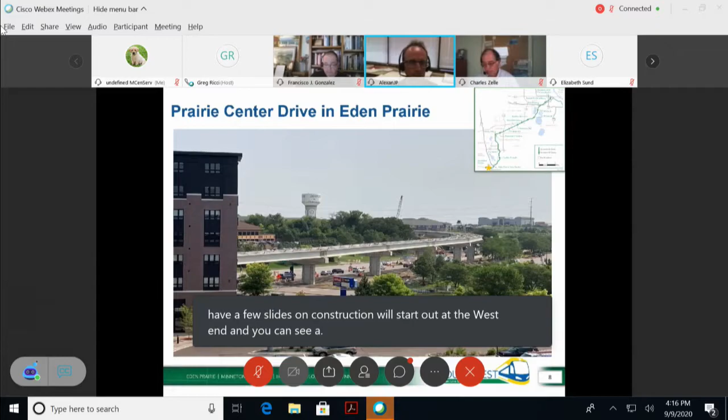So I have a few slides on construction. We'll start out at the west end, and you can see a little tip of the Elevate building there, but this is the Prairie Center Drive bridge that goes over Technology and Prairie Center Drive and will lead up to that water tower in Eden Prairie.

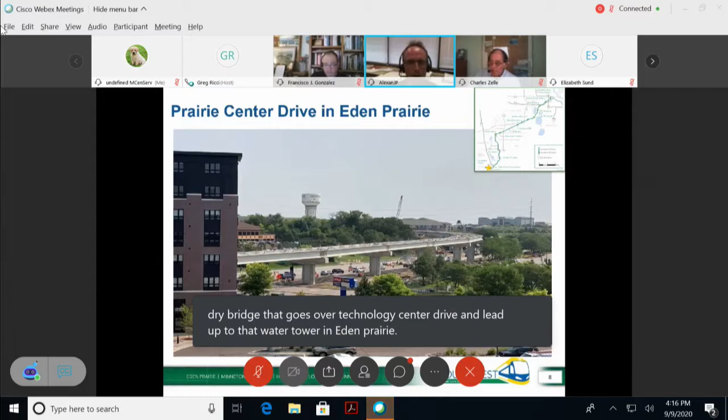This is kind of the other end of that area. This is Valley View, and you see the water tower in the background, but this is another bridge for LRT that will take us from essentially Eden Prairie in the heart of it and bring us into the Golden Triangle area.

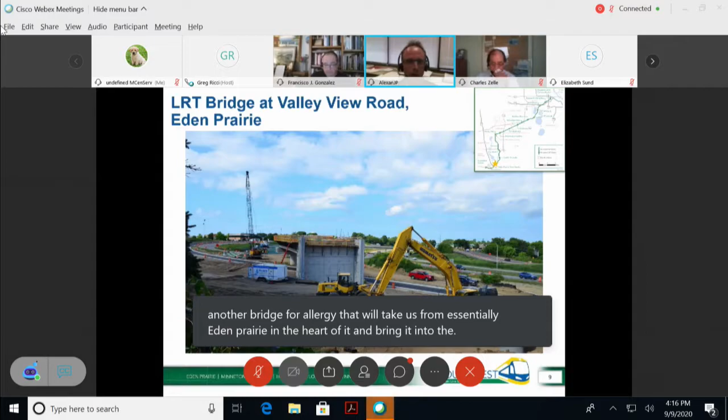This is one of our stations that's underway, Golden Triangle station, coming well along. Last time I think I showed you just a framework of a structure. It's really starting to come together here.

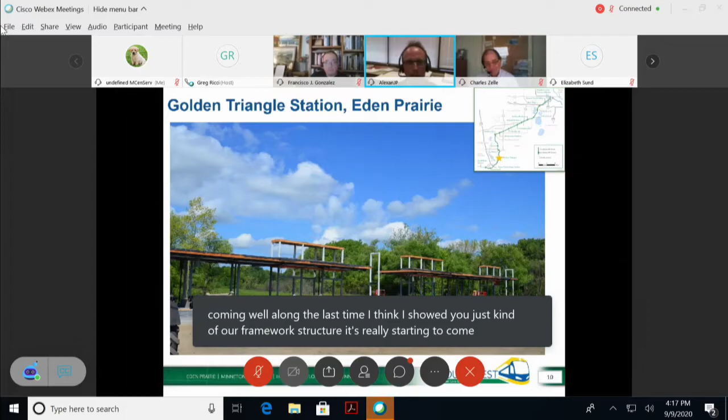Highway 62 in the background. This is the east end of the LRT tunnel that the contractor is building, and that's getting well underway. They're looking to get that all buttoned up later this fall, and we'll be working on the other segment on the south or west end in 2021.

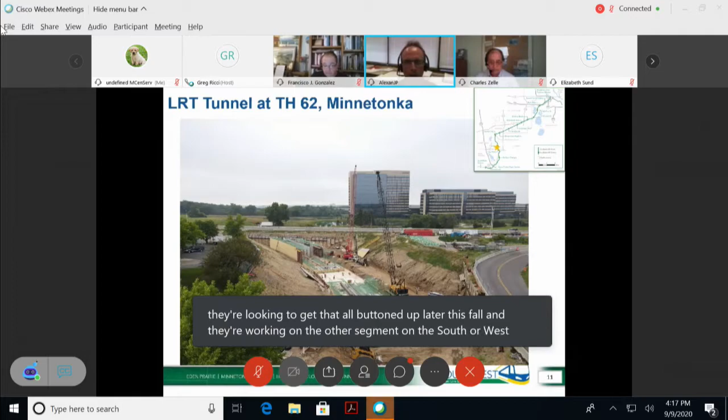Another station taking shape here, Opus Station. I think last I showed this in May, it was really a pile of dirt, and we're really making some headway on this in this area.

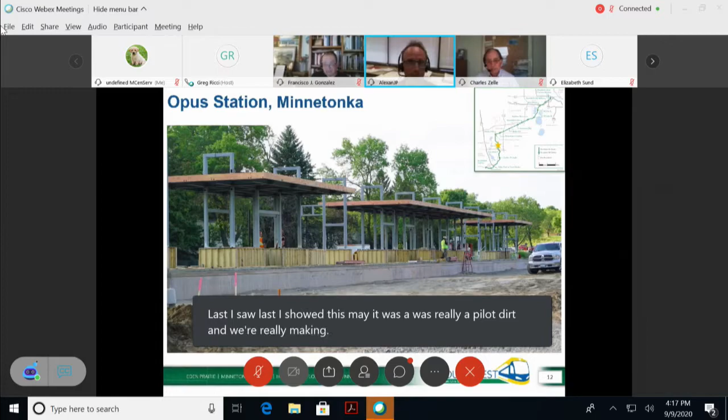Another station, downtown Hopkins. This is coming along pretty nicely.

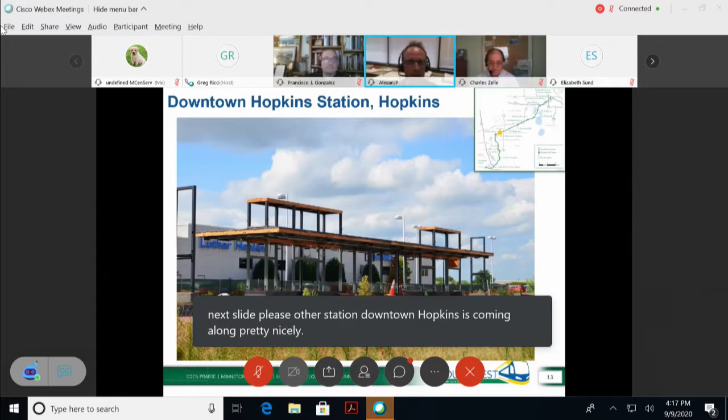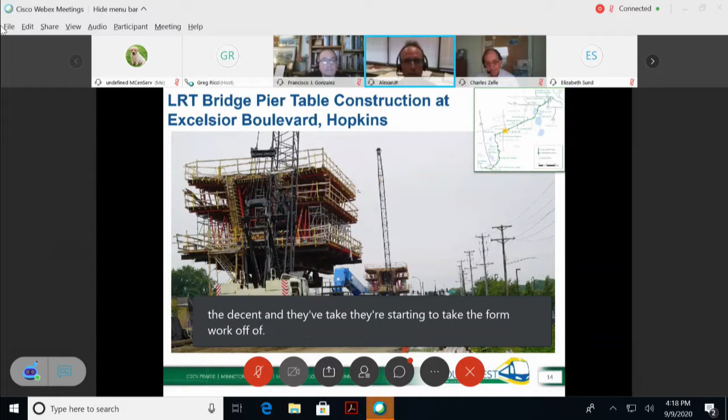Maybe one of the premier bridges we have on the project - this is a bridge that will cross Excelsior Boulevard in Hopkins. You can see it's taking shape quite a bit in the background. The concrete's already been placed for that pier table you see in the distance, and they're starting to take the formwork off of that. So that'll carry the LRT over that roadway and the freight.

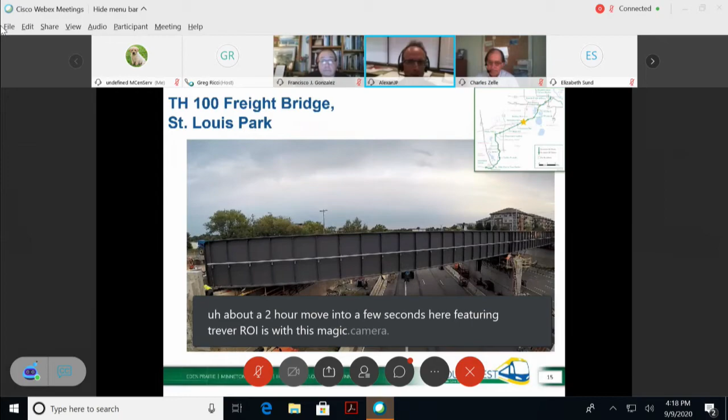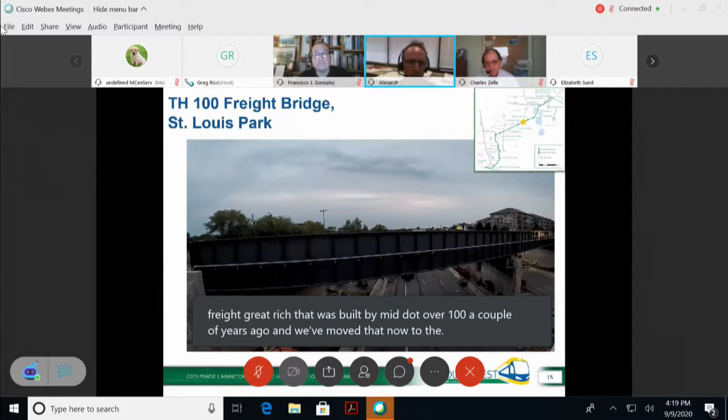But things went pretty well. There were 8 rollers under this bridge, and everything had to be in sync to move that bridge about 50 feet to the north into its permanent location. This is for the freight bridge built by MnDOT over 100 a couple of years ago, and we've moved it now to the center of the corridor to accommodate room for LRT, which would be on the other side of this bridge.

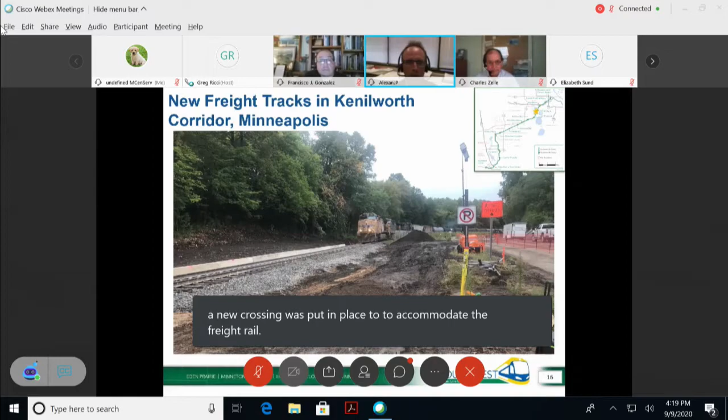Next slide, please. This is other work that occurred over the weekend. This is near 21st in the Kenilworth corridor, where a new crossing was put in place to accommodate the freight rail. And you see the first freight train coming in through that new track there early in the morning on Tuesday, and I think it's the last picture we have.

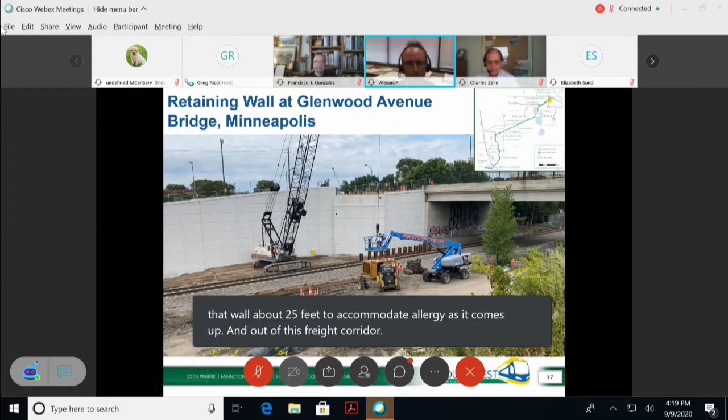This is a retaining structure that's been underway all summer long, along the BNSF line close to Royalston. This will allow BNSF to move their track towards that wall about 25 feet to accommodate LRT as it comes up and out of this freight corridor and makes its way over to the Royalston station. So, next slide.

We also give you an update on real estate acquisition status. Things are going along pretty well. Overall, 191 parcels. For the private parcels, we have 70 where acquisitions are completed, and 79 are in place. So we just note that we do have full possession of these sites for construction, and we're looking to extend some temporary easements along the line just to make sure we have

enough time to finish the work. There would be as-builts to be done, and cleanup work that needs to be done, so we'll have that in place. And related to the real estate, we have a total of 177 displacees. You can see that most of those have been closed out. A few are going through appeal, and these 5 remaining are being finalized.

So, Mr. Chair, I might pause there if there are any questions from what I presented, and otherwise I'd hand it over to Tracy.

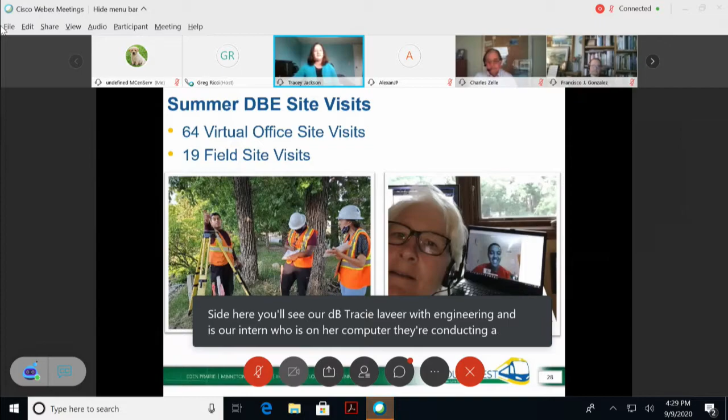In addition to virtual visits, we are also able to do field visits. The photo on the left shows a great way for us to connect with the DBEs, find out how their work is going, and learn if they have any concerns. Here we have our two interns, Charlotta and Mahad, interviewing the DBE Omar from IMO Consulting, who was conducting vibration testing on the project.

Again, it's a great way for us to connect. Some of the concerns we may hear from them, whether in the field or on a virtual site visit, is when can we expect payment, questions about schedule, or if they're a supplier, about materials on hand. This gives OEO the chance to proactively look into these concerns and follow up with the DBEs within a day or two, then connect with project staff. We can find out what pay claim or invoice is pending, and the estimated date of payment, maybe 10 days or whatever it might be. So those are some of the things we do to connect and look into.

As partnership with MDHR, when our office went out to the construction sites, we were joined by the human rights staff so they could also conduct their workforce site visits. With 3 site visits to construction sites, MDHR was able to interview 53 workers, with a breakdown of gender and ethnicity, representing 13 companies. So in closing, that's the DBE and Workforce update.

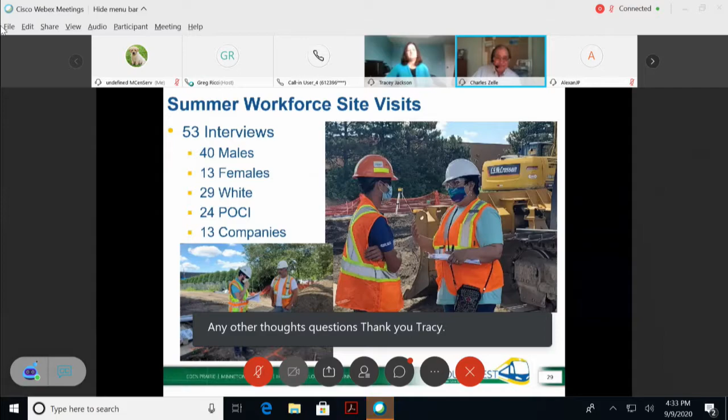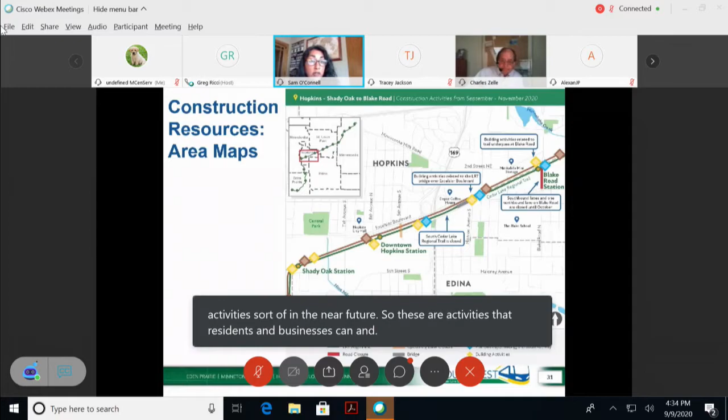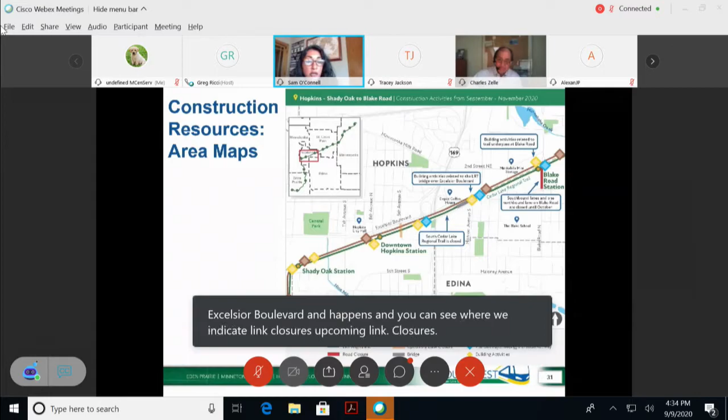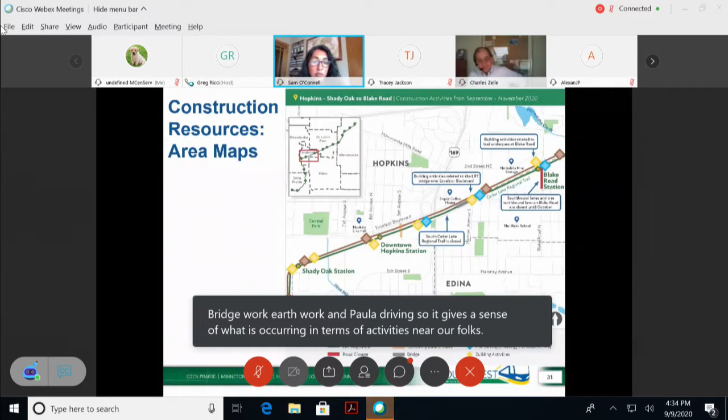Greg, if you don't mind moving to the next slide, please. Just as a reminder, an information item we feel has great value as we share with residents and businesses about our construction activities are our community maps showing activities in the near future. These show what residents and businesses can anticipate occurring near them within the next 6 weeks, and we update them on a regular basis. For example, today I'm sharing the map along Excelsior Boulevard in Hopkins, where you can see lane closures, upcoming lane closures, bridge work, earthwork, and pile driving. It gives a sense of what's occurring near our folks. As the chair said, there probably isn't a community that isn't well aware of our activities, so this outlines a little bit of what we are doing, along with more detail on durations. I wanted to share that with council members, so if you get questions from constituents, we have that as a tool to use and share construction information on our website.

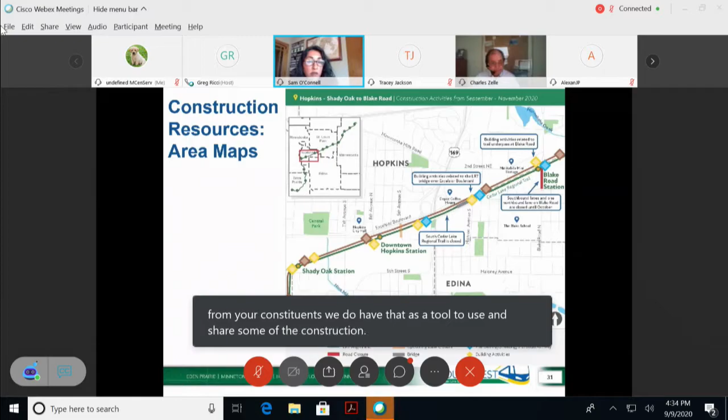Greg, if you could move to the next slide, please. I also wanted to provide an update on our social media metrics. This is a good communication outreach tool we've been using, so I'd ask everybody, if not subscribed, to make sure they subscribe to our Friday construction update. Just to give a sense of where we are, we're over 16,600 subscribers, which is fantastic. Every Friday that's sent to your phone or email inbox, giving you the next activities in your community for construction updates. We're maintaining a pretty high open rate, between 46 and 49 percent. I'm very happy about this tool, and we continue to see it grow. I'd also highlight our Twitter followers.

We're expanding in that number as well. So last April, we were about 925, kind of like right before major construction activities occurred in April of 2019. And then we're sitting at about 1,300 right now.

I would also say thank you to our council members and to the council communications for retweeting a lot of our information, especially when we've had lane closures like this past weekend with Trunk Highway 100. So just wanted to say thank you.

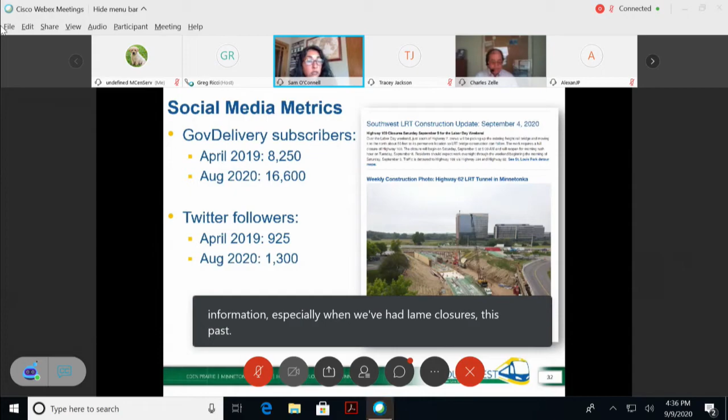So those are the highlights of our construction. I'd be happy, Chair, to stand for any questions. Otherwise, I can just turn this back over to Jim for the FFGA update.

Any questions for Sam?

I have to say, as a regular subscriber and participant in how our engagement folks are really working with neighborhoods, it's a real hats off to you and your team. They're very responsive on a big project. Thank you.

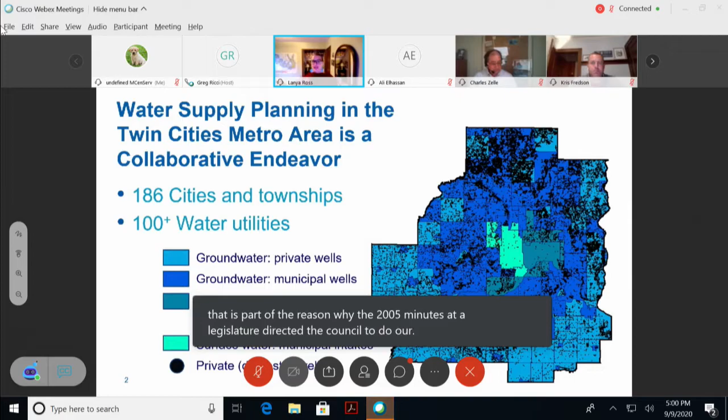The scale and complexity of that is part of the reason why the 2005 Minnesota legislature directed the council to do our work. Minnesota Statutes 473.1565 specifically charge us with developing and maintaining a base of technical information, developing and periodically updating a metropolitan area master water supply plan, and making recommendations to clarify roles and responsibilities, to streamline decision-making and approval processes, and to make recommendations for funding.

So we don't do this alone. We work very closely with a metropolitan area water supply policy and advisory committee, affectionately known as MAWSAC and TAC. We also work very closely in collaboration with local, state, and even federal stakeholders across the metro area.

This same statute requires us to report back to the legislature regarding our findings, recommendations, and planning activities. We are to include that in the Minnesota Water Plan, and we may provide 5-year interim reports as necessary. So that is the report that I'm sharing with you today, and we will be submitting it with the EQB as part of the Minnesota Water Plan to the legislature.

I just want to walk you through some of the content in that report and highlight the fact that this is really a package that summarizes the work we have done, not just the Met Council, but with our partners since 2005. So if you want to know the council's scope of water supply planning, hopefully this is the document you can look at to get a sense of that history and what we've accomplished.

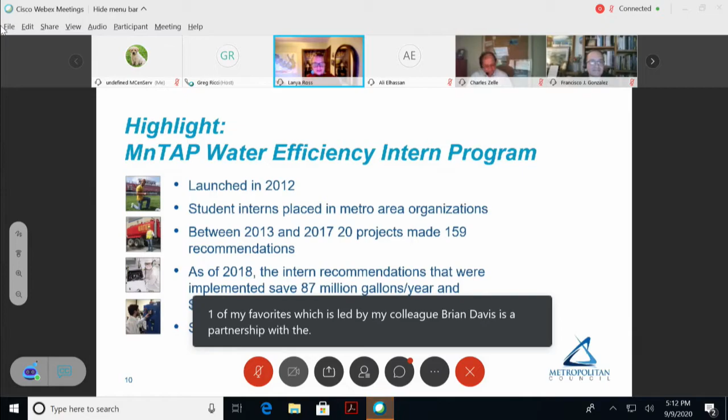One of my favorites, which is led by my colleague Brian Davis, is a partnership with the University of Minnesota's Minnesota Technical Assistance Program, MnTAP. It's the Water Efficiency Intern Program, and it was launched in 2012, and it places student interns in a variety of metro area organizations.

Between 2013 and 2017, 20 intern projects made 159 recommendations. By 2018, this team went back and looked at whether people actually implemented those recommendations and what the impact was. They found savings of 87 million gallons of water a year and $486,000 a year in those businesses who made recommended changes. That program is still going strong, so we'll be coming back to give you updates in the future.

If you want specific examples, Google MnTAP Solutions. They put out a newsletter showcasing each of these projects where you can learn more details.

Another program we've run since 2015 is a water efficiency grant program. Brian Davis is leading this, and we're seeing great results. It's highly supported by communities in the metro who participate or want to participate. We piloted this from 2015 to 2017, funded by the Clean Water Fund. That money comes to the council and all of it goes back out to the communities. We cover 75%, they kick in 25% to start a local water efficiency program giving rebates for efficient fixtures to residents. In the pilot, 4,500 total devices were replaced, saving an estimated 52 million gallons of water.

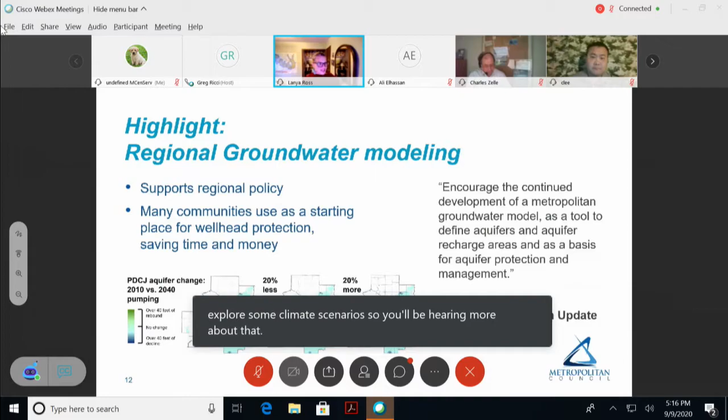All of this is helping us get to a better place than we were in 2005.

I have a lot of pride in this work. Ali mentioned I joined the council in 2006, right as this was beginning, so I've gotten to see it grow from a seed into multiple programs, many more than I was able to talk about, connecting our work to residents, businesses, and communities all over the region. Putting this report together and summarizing all the projects and programs we've built really highlighted to me how proud I am of my coworkers, not just in the water supply planning unit, but also those integrating water supply planning into the climate vulnerability assessment and other parts of the council and other organizations.

The partnerships we're building with partner water agencies and communities are amazing. Because of that, we have a better understanding of our shared resources and our challenges. We have a successful sub-regional collaboration in place advancing water sustainability goals. We need to keep building those relationships, but we've gone from 20 communities participating in sub-regional work groups in 2005 to 72 communities represented now. We have better management and long-term resiliency of our shared resources, and more resources focused on regional water supply challenges. All of that together means we're all — residents, businesses, the council, agencies — better equipped to pursue next steps.

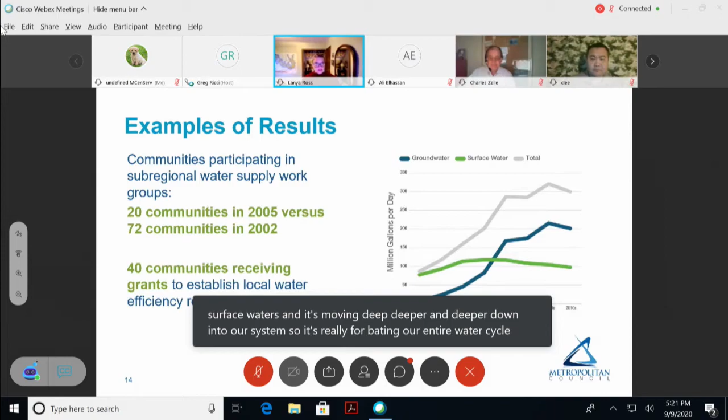So as we think about these questions and others, we're continuing to work with our advisory committees and our community collaborators. And some of that work is going to come back to you as we start to think about future policy considerations. So this work we've been doing is really setting the foundation for: are our policies adequate? Are they supporting us moving in the direction that we need to go? So that's something you'll be hearing more of.

And a lot of this work that we're doing, and the new work that we'll continue to do with guidance from our partners, is going to be shaping some of those local projects. So in your communities, there may be some projects that are done there.

So I'm just going to end by reiterating, this is all part of the water cycle. It doesn't have an end. So this is just a nice place to kind of report on where we are now. And I think it's a nice tool to be able to pass on to the new people we hire so they know what we've done, so they can continue the work. As we move into different positions, or leave the council, sharing that knowledge I think is really important as well.

Thank you for your patience, and I'm happy to take any questions.

Thank you, Lanya, and wow, what a great presentation. That was wonderful. Water is so critical in the land of water. We are so often taking it for granted. So actually getting deep data and understanding of where that supply is and where our usage is, and the implications that you ended with, the questions for the future. And I say, for one, now I am a total admirer of geeks who read appendixes deeply. So I'm going to look at that carefully.